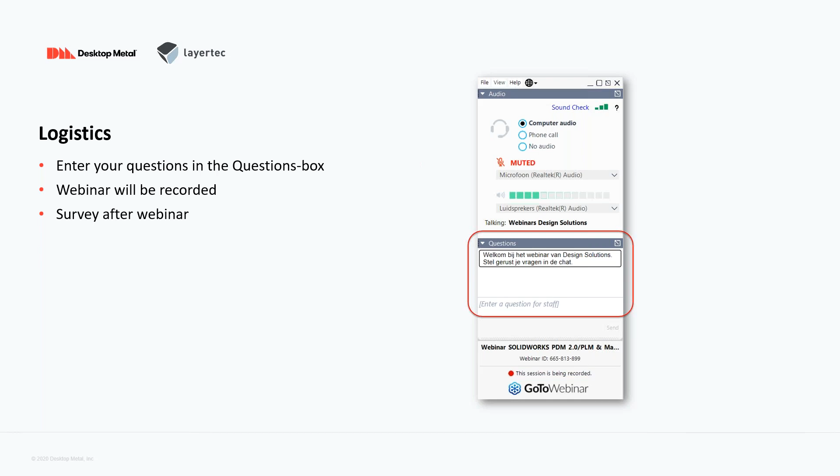Okay, let's start with a quick introduction of Layertec. Layertec is part of the Visiativ Group, serving more than 18,000 companies worldwide. We are listed on the stock exchange with the name Alviv, and if I could point out one thing, that would be that we are always heavily investing in our R&D.

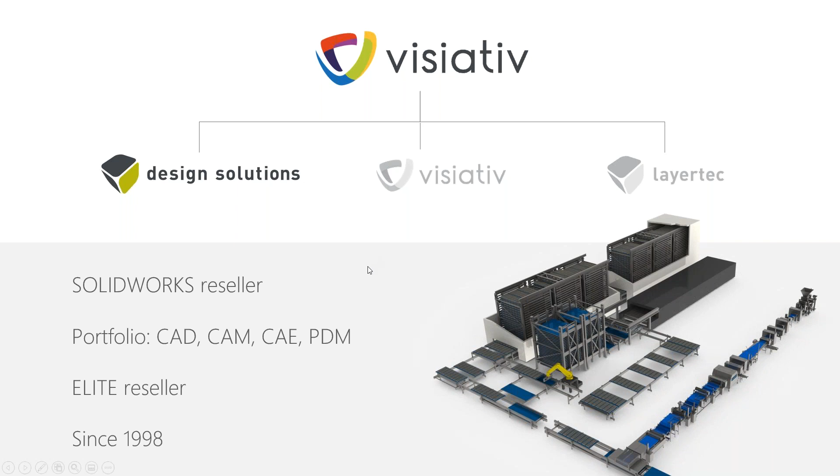When we zoom in on the Benelux, then you will see three companies in the market: Design Solutions, reseller of SolidWorks since 1998; Visiativ, with the entire portfolio from CAD, CAM up to Catia and Enovia; and of course the 3D Experience platform.

And there we are, Layertec. We are a reseller of Formlabs, Ultimaker and Desktop Metal 3D printers. We are thus enabling companies to print in plastics, in composites and metal. And with all our services combined, we are truly a 3D printing partner for more than 200 companies and professionals in the Benelux at the moment.

Okay, no problem. There you go. Okay, is everything viewing okay, Lisa? Yeah, looks okay. Perfect. Fantastic, thank you.

Good afternoon, everybody. As I've been very well introduced, my name's Kirk Dyke. I'm a senior applications engineer for Desktop Metal with a number of decades of 3D printing, metal printing, plastic printing, etc. Here to share some of our knowledge with Desktop and give you an overview of how our systems work.

So, as you know, Desktop Metal was founded in 2015. We're quite a young company. We're growing aggressively over the last few years and soon to go public. So we've created a product line that has a number of technologies.

We have our fiber machine that is going to be released next year. That will be covered in other questions or another webinar at some other date. Studio system and shop system, both currently shipping. Studio system has been shipping now for approximately 18 months and is widely around the world. Shop system is just currently starting to ship and pushes us into different applications and technologies.

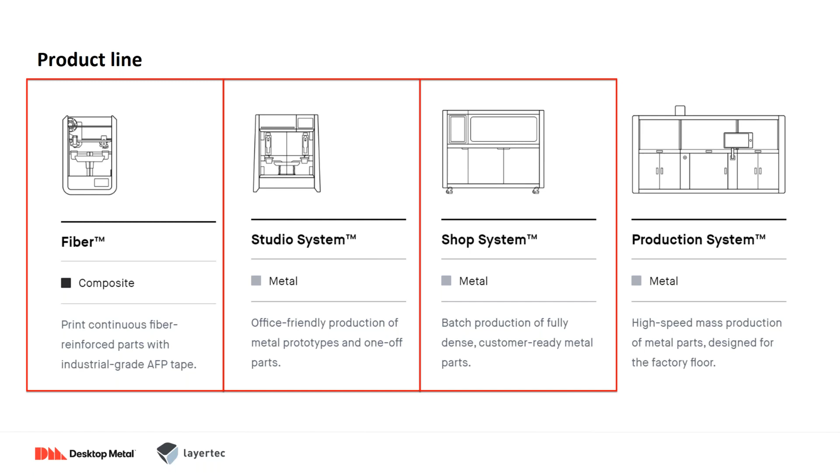So let's start with the promise of 3D printing. It comes from many manufacturers. It's a new-ish technology for manufacturing, which began for the request of rapid prototyping of certain components.

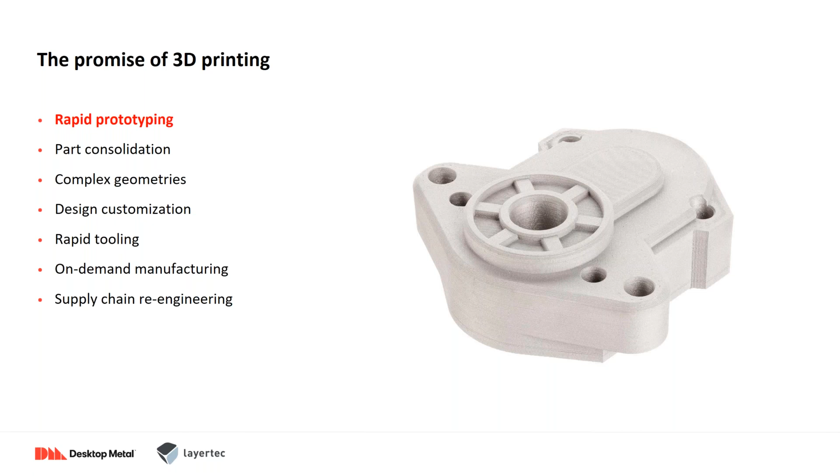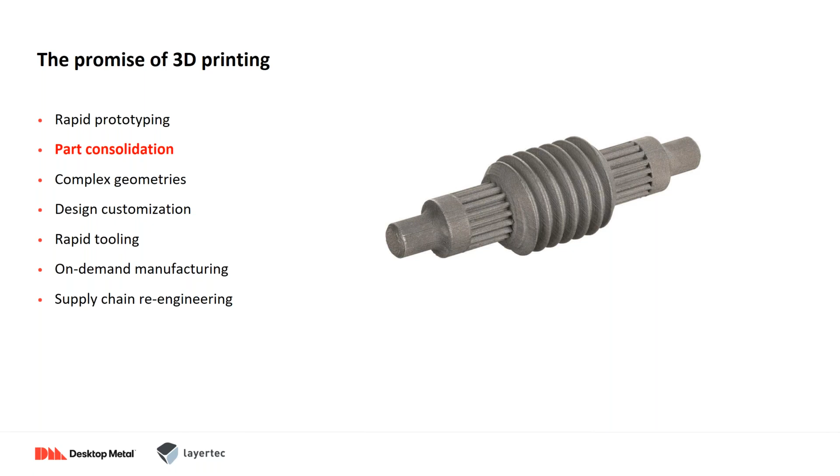So 3D printing delivers a promise of consolidation of parts, complex geometries that are either impossible to manufacture using current technologies, or we can use them to manipulate the 3D printing process and evaluate design and improve design.

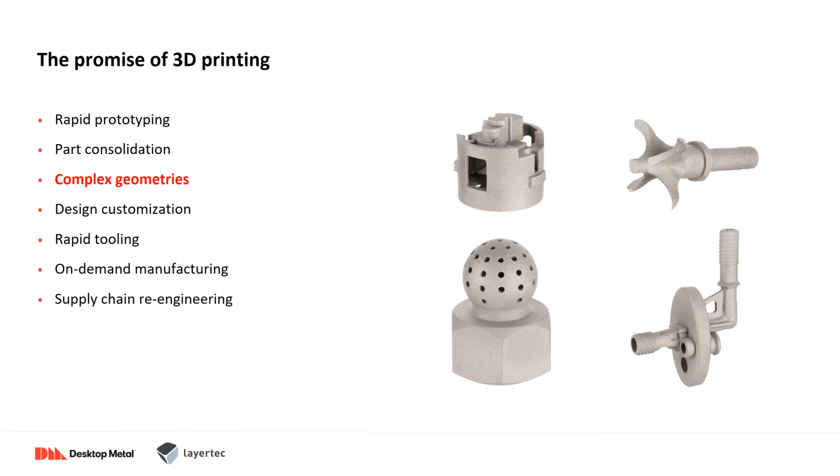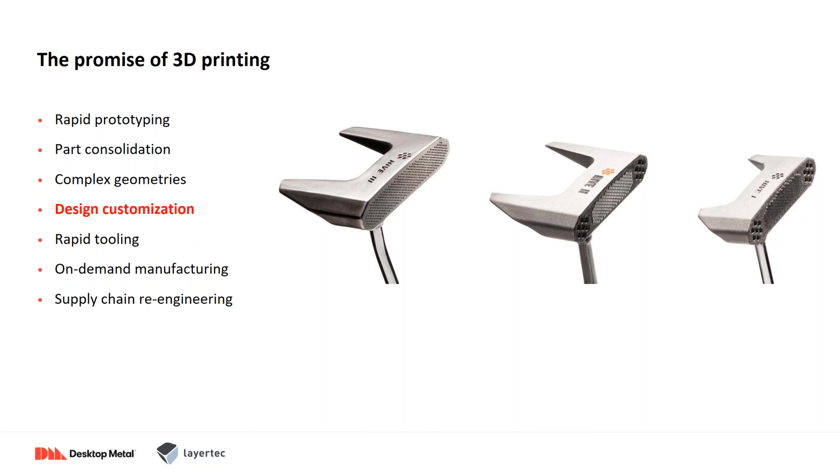Design customization, so this is derived from the consumer industry, where we have bespoke parts that are unable to be made using current manufacturing technologies. And rapid tooling, a way of creating tooling in a much faster way.

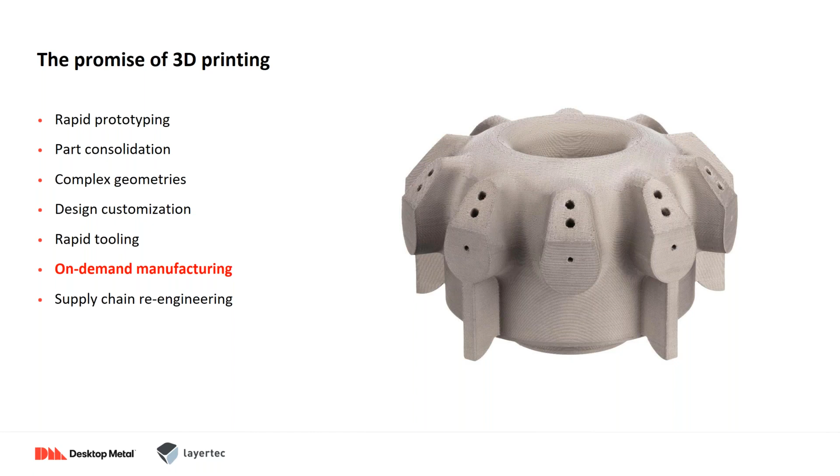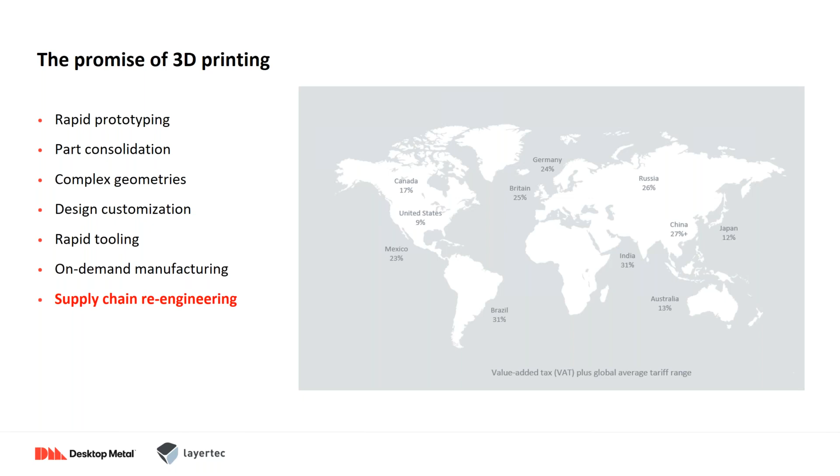On-demand manufacturing. As time goes by, this is going to become more important to the world economic climate, where we can call off a virtual library of parts and print on demand. This will lead us into the supply chain around the world, where we're not shipping parts, leading us to a greener world, a more efficient world, and hopefully a better cost-effective part.

So the first challenge we have is to deliver a product that is office friendly. We want to complete on-demand parts where we have no special facilities or highly trained operators, and we can deliver a broad palette of familiar materials. This will lead us to a path of mass production and the production unit, as mentioned earlier.

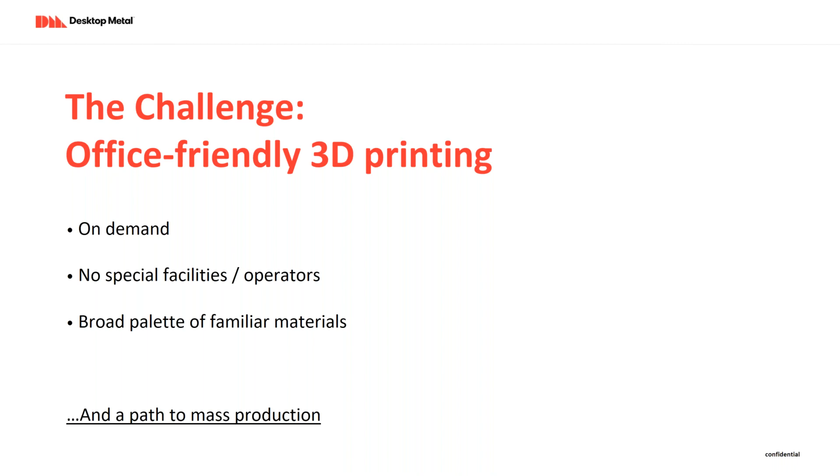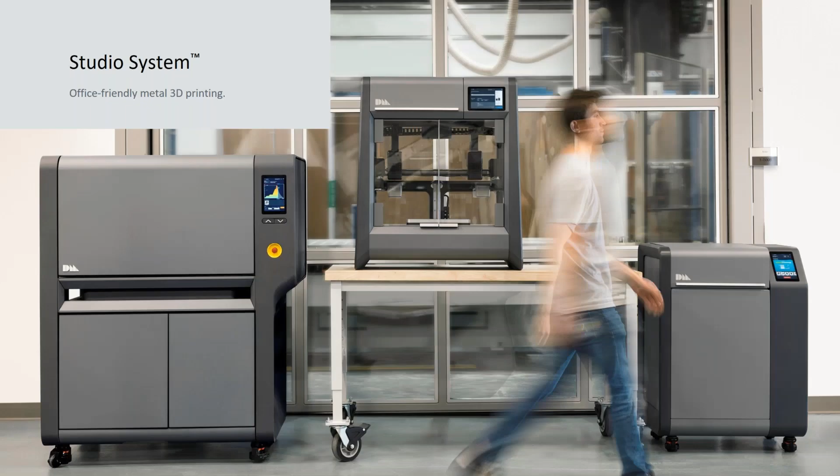So how it works - we'll start with the studio system. This product was designed with office friendly in mind, something we can install on site quickly, easily, user friendly to use. So the user interface is simple and the equipment can be easily installed into most offices.

So the idea of this process comes from metal injection molding. MIM is a powder metallurgical process, and it will enable complex shapes to be produced in mass production from inexpensive metal powders. It's been around a long while, and we've used that technology and developed it into our own. It's widely accepted and validated to ASTM and ISO standards and exists for a broad range of materials: stainless steel, alloy steels, copper, titanium, and cobalt-based alloys, etc.

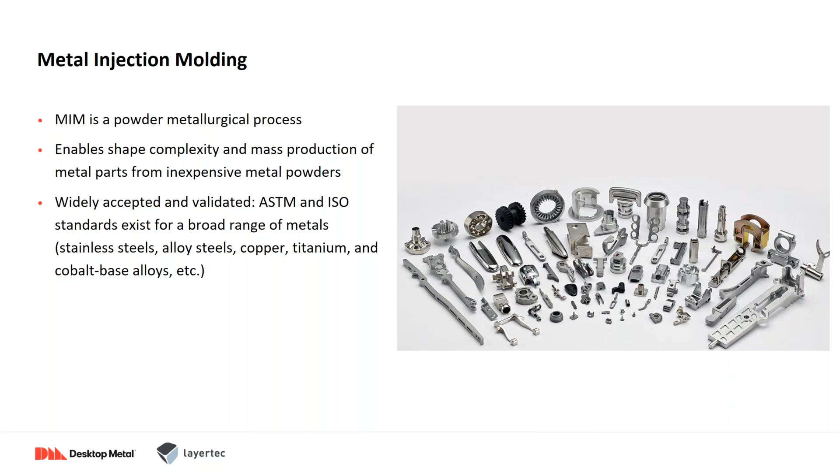So MIM uses this sintering technology for many years with many powders. But how does MIM work? And how does it compare with our studio system? So let's start with MIM.

So MIM uses a mix of metal powder and binder into a feedstock - you could say a slurry type form. This is then put into a piece of equipment similar to injection molding, which will require tooling, and the parts are injected and created, so we can have a production level of parts coming off this machine.

But we still need to remove the binder that is holding the parts together at this point. So we have to go into a solvent-based product to remove the binder that is holding the metal particles together. This is then taken in a raw state and placed into a furnace which densifies the metal particles and creates our solid part. So that's MIM, and that's the process of how MIM works.

We've taken that technology and we've transformed it into a 3D printing technology. So where do we compare? First of all, we look at the metal powder and binder that's used in MIM. We use a feedstock, which is very similar to what MIM is using. We combine metal particles of powder and binder together and create a feedstock rod.

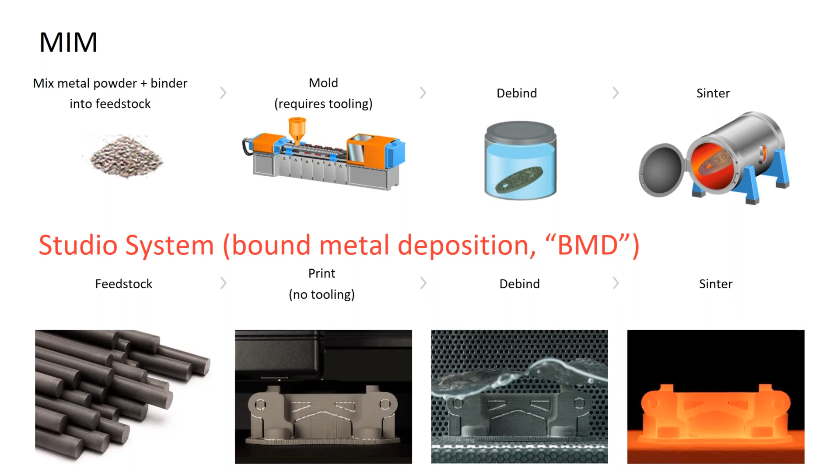So in order to do this, we have a three-dimensional printer, very similar to the FDM process or FFF process, and pretty similar to designs that you've used in the past over the last couple of decades that have come from plastic extrusion. So we've designed the printer to be office safe, to handle the material and the powder rods, so there's no powder handling whatsoever with regards in this process.

Again, the debind is necessary to remove the binder. We've created a product that has low emission in design. It automatically distills the solvent inside, removing any binder or wax, and it's safe for an office environment. The furnace also - we've taken a lot of time and development to create one of the first office-friendly sintering furnaces. This will fit through a door and at its peak can reach 1400 degrees C. This is where we will place our parts and densify the powder particles into a solid metal shape.

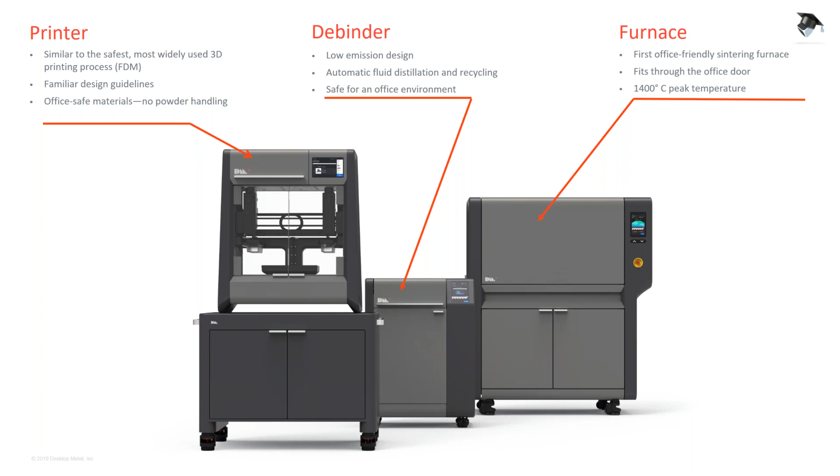These metal shapes are what we call near net shapes. So the printer is capable of printing a part 12 inches by 8 inches by 8 inches, 300 by 200 by 200 millimeters. And the resolution, accuracy and surface finish is similar to casting. So we need to have the expectation of dimensional capabilities. At this point, it's geometry dependent, but we use a rule and a general direction of plus or minus 0.8%.

Any critical dimensions that are needed can be achieved via post-processing, for example CNC, EDM, grinding, etc. Remember, this is a metal part. Whatever you could do before with a metal part, you can do now with this metal part. It's fully compatible with traditional finishing operations also. So if we need to polish, we can tumble, we can blast, we can plate it, we can even weld these parts together, and we can heat treat them.

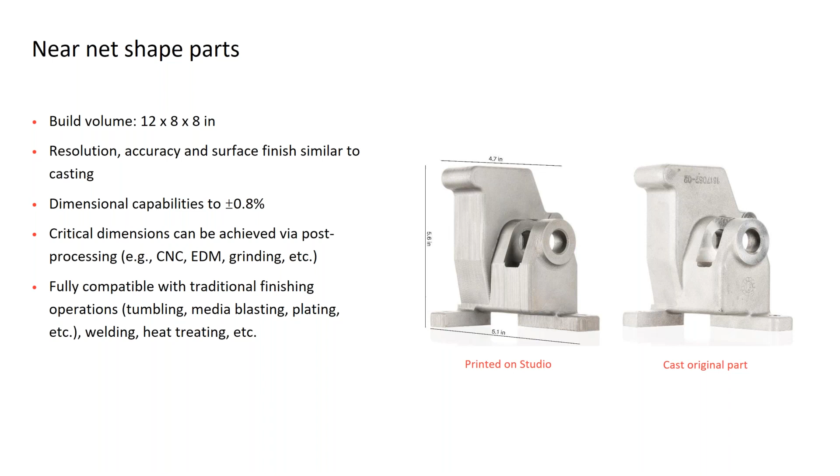So we ask ourselves, what materials are available for the studio system? At present we use 17-4PH stainless steel or 316L stainless steel. Recently we've released H13 tool steel and 4140 carbon low alloy steel. Soon to be released is copper, all being well this year, and sometime early next year we should be looking at releasing alloy 625, or Inconel based alloy powders.

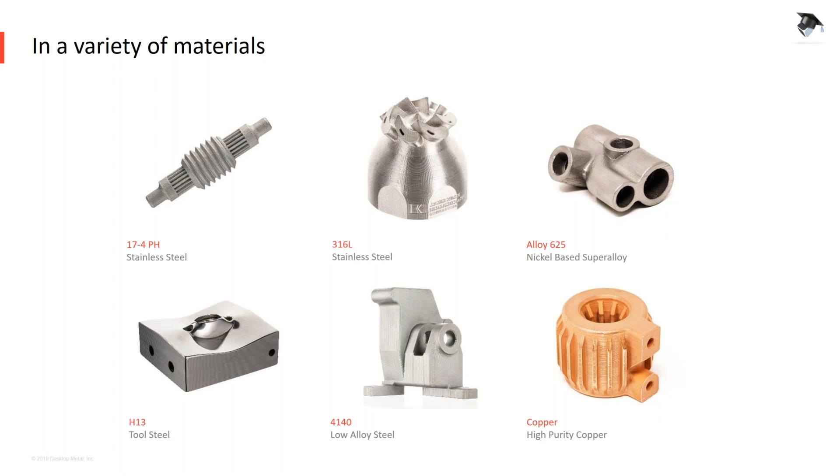So let's just recap on the studio system. What are the advantages? No hazardous powders, no respirators, no dangerous lasers, no third-party equipment, turnkey, no dedicated operators, no welded supports, and no special facilities required. Every office would be glad to have this as part of their portfolio to use.

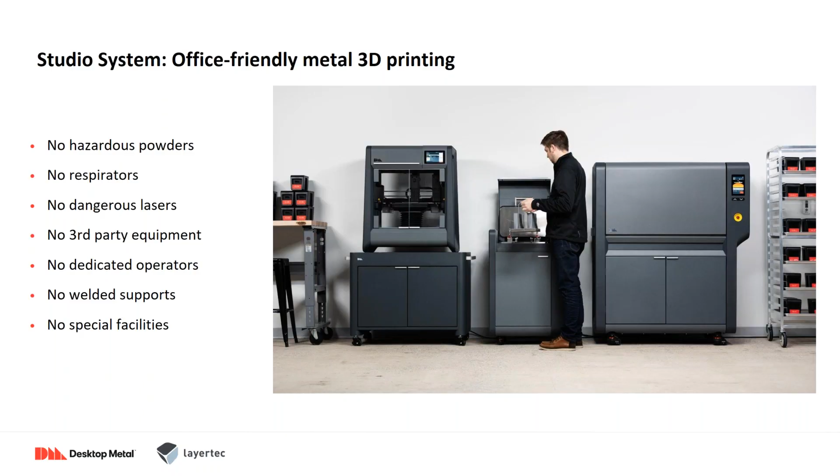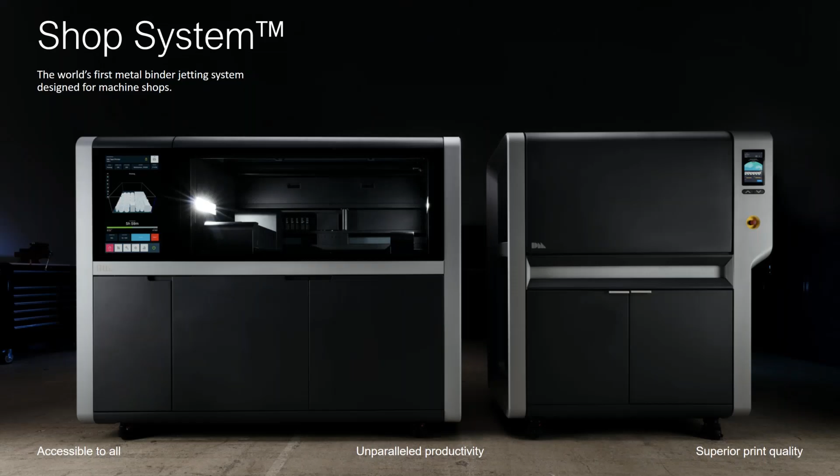So we're going to move on now to a more powder-based, our newest product in the portfolio of equipment to desktop metal. And how does a shop system work? The screen in front shows you an example of the shop system printer, and on the right is the shop furnace.

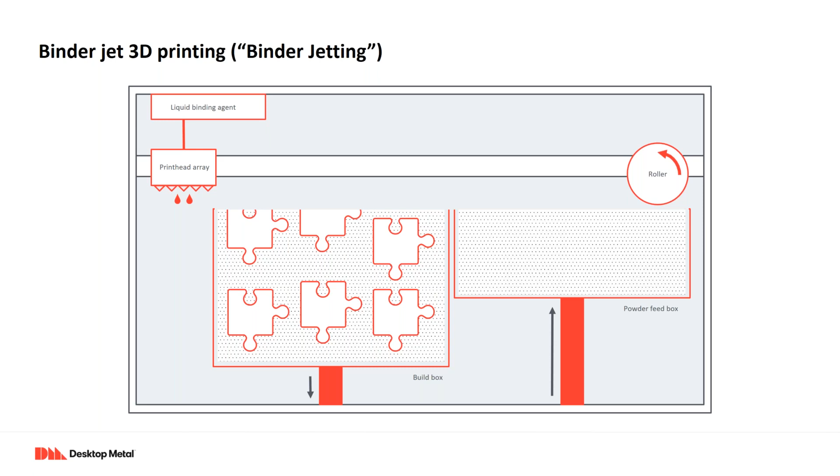How does this work? So we look at the feed box. The feed box is full of powder. A roller will take a layer of this powder and put it into our build box. The print head array will come across and print its two-dimensional geometry on that particular layer. The build box will lower, the feed box will raise another layer of powder, and the print head will print the second two-dimensional layer, eventually creating a three-dimensional part, which can be removed from the natural support of the powder and sintered.

With this process, we don't need to debind through using a solvent, but there is still binder that's being applied to the part. We can thermally debind this through the furnace itself. This is an example of the ramp-up curve and the time for the sintering process to go through. So we ramp up, we thermally debind, we hold it for some hours, and then we ramp back up to somewhere around 1400 degrees where we sinter the parts together, and then we naturally cool down to create our solid part.

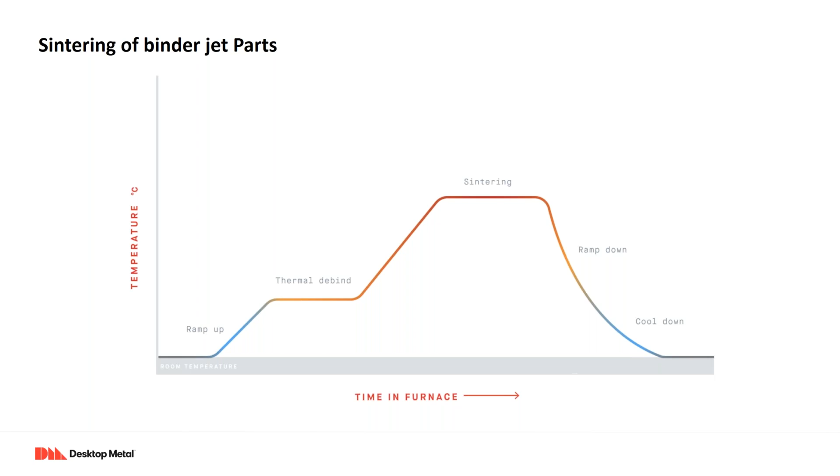So the shop system has some advantages that we can take to low volume or even high volume production. It's unparalleled productivity. Produce various parts, geometries simultaneously without the need of multiple setups. Produces hundreds of near net shape parts every day with dramatically reduced labour costs and expanded geometric flexibility.

And as you can see from the example on the right hand side from a build box taken from the shop, you can see a number of parts, all different geometries, all built together in one go. This means we can pull from our virtual library and build at need.

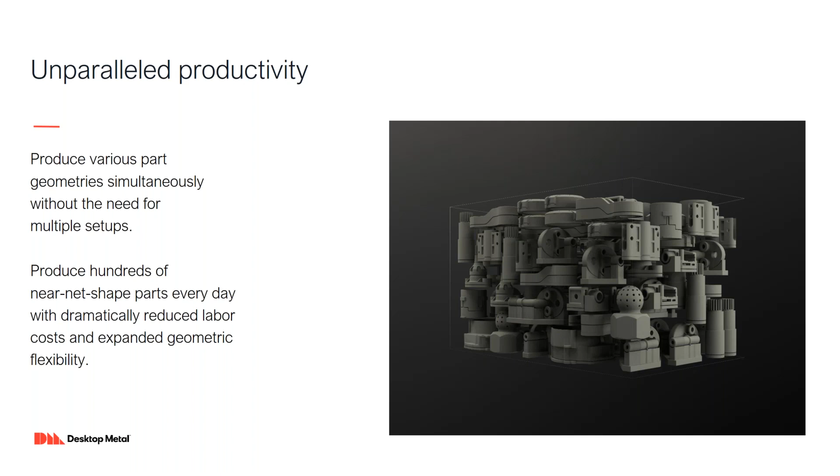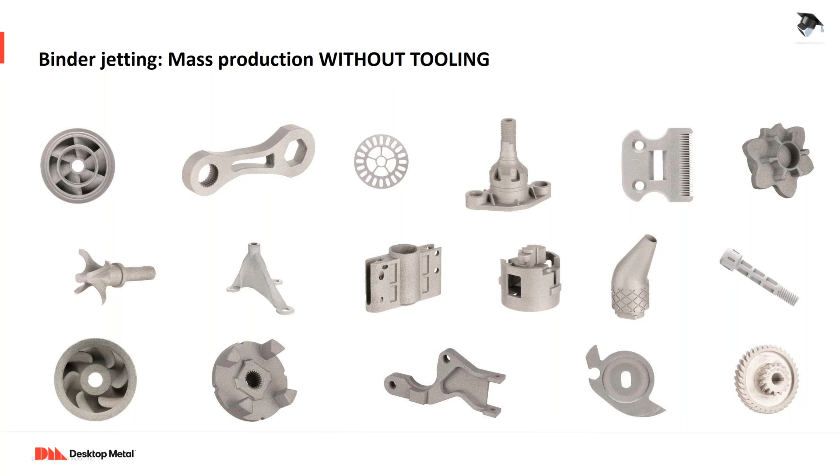So as in MIM, we have a wide range of applications. And binder jetting can give you mass production, but without the tooling costs. These are some examples of some small components that we've successfully created and achieved. Some more examples here showing the quality and the detail that we can achieve with shop system.

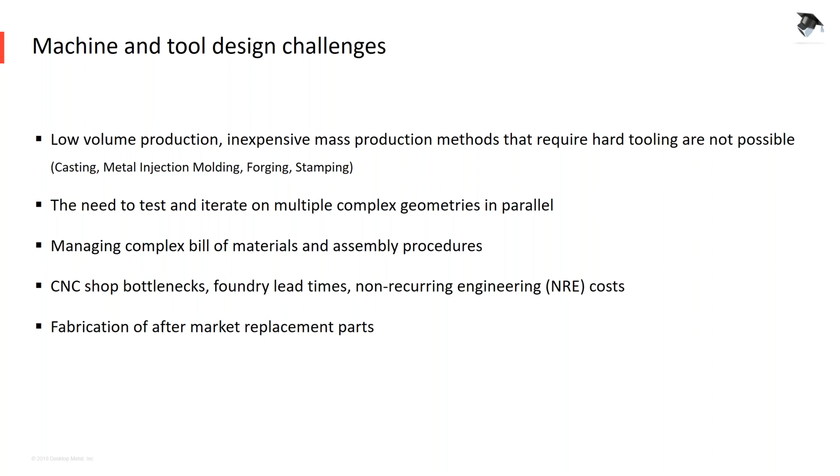So where do we fit as additive manufacturing solutions? For low volume production, we don't require tooling to use our process. And the part cost stays the same if you need one or you need 10,000, and we're capable of delivering that. So you need to test and iterate multiple complex geometries in parallel - rapid prototyping parts in metal in the comfort of your own office. Test function under high load, heat and corrosion, and not just form fit.

Managing complex bill of materials and assembling procedures. Using 3D printing, we can consolidate assemblies, allowing for greatly reduced part counts and simplified assemblies.

CNC shop bottlenecks. We can take manufacturing into your own hands and greatly accelerate manufacturing lead times, and fabrication of aftermarket replacement parts. So there's no need to keep parts in a warehouse for replacement parts. Just pull up the file, print, sinter, and ship the part in a few days.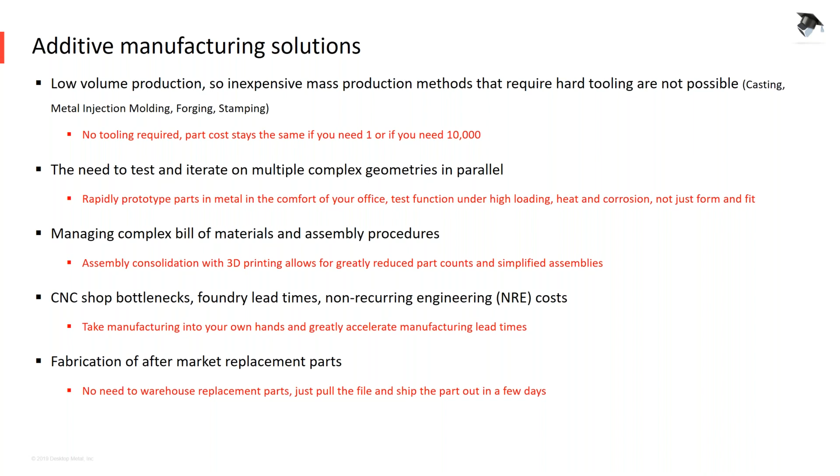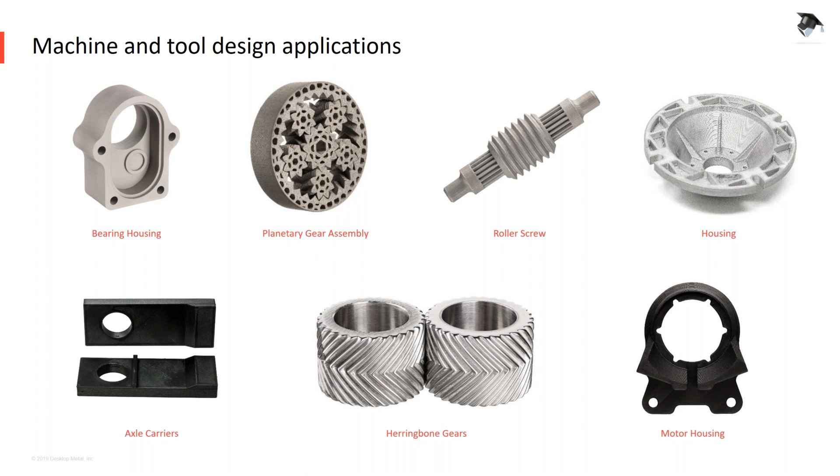So I'm going to move into a motor mount. Tool design can be quite complicated and we need to reduce space, reduce cost, and we may have to have many iterations of certain housings or mounts that we need to do.

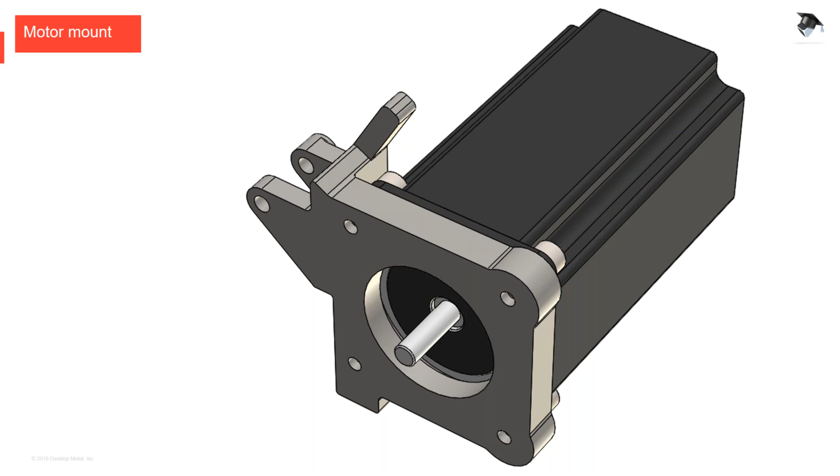This is an example of a standard NEMA motor that's going on a piece of equipment that requires lots of CNC setups. You have to send the requirement down to the shop and wait for the billet to be machined, wait for space on the CNC machine. But during development, prototypes change and we can do this very quickly. We also have lots of different sizes and geometries that we can produce.

So for low volume manufacturing, less than 50 a year, on-demand printing eliminates CNC cost and inventory. The part on the right is 3.5 inches by 3.4 by 1.1, for reference.

And for reference at the bottom, we've done some calculations with an outsourced CNC shop and what our cost would be against a studio system. First of all, you look at the cost - it's considerably less than CNC. What's probably more important is the lead time. We can create these parts in days rather than weeks.

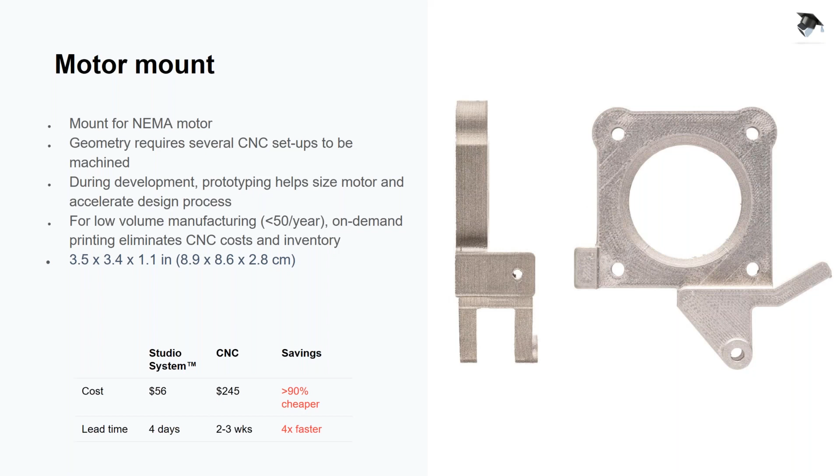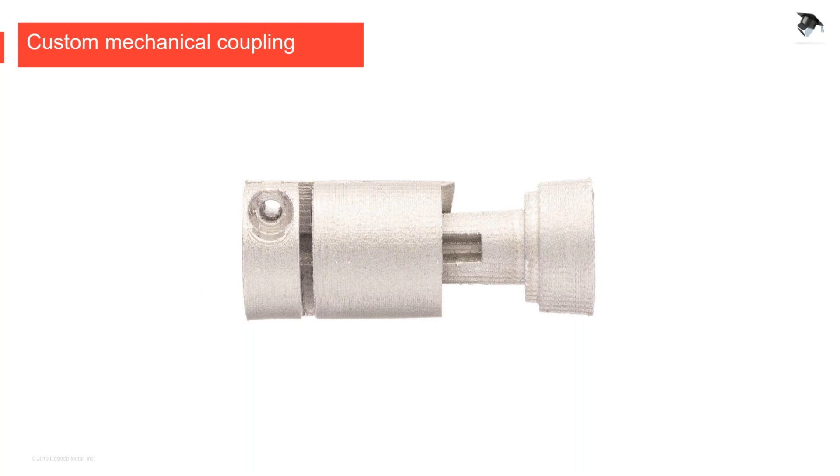Next example here is a custom mechanical coupling - a small component, quite complicated in geometry, but very easily done on a 3D printing metal machine. This custom coupling for a rotary powered transfer between custom pieces of machinery has complex geometry to optimize power transfer.

We've got the freedom of design here to transfer power in different ways than we could do when we had to machine these. It must be metal due to strength, stiffness, and lifetime requirements. So it's prototyped on the studio system, but would ideally be suited for mass production on the shop system.

For reference, part 1, part 2, you can see 1 inch by 0.9 by 1.6. And again, if we look at some outsourced costings that we have for CNC, the cost is considerably less, especially for low volume production. So a studio system can get you to the point where your design is correct, and then you can lock it down and build a low volume production run on a shop system. This particular one was costed at 750 sets per week.

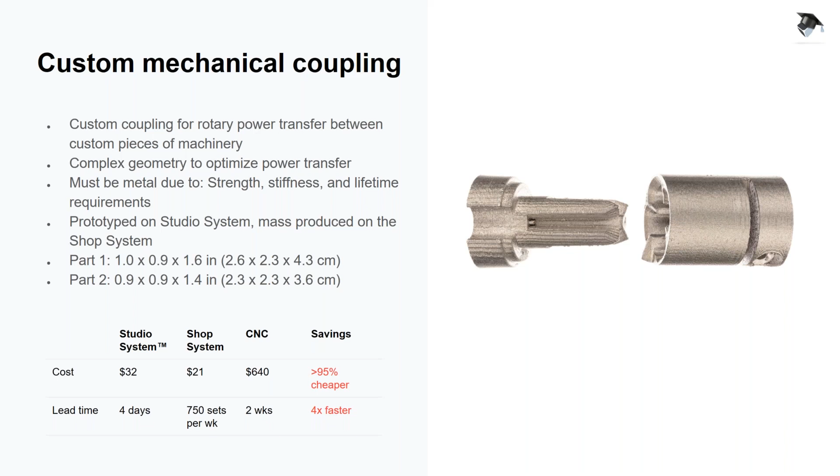Another example here is a motion stage fixture or flexure. This is to enable or to stop vibration. This was designed and developed on the studio system.

A flexure is an engineering component designed to be compliant over a small range in a predictable manner. The flexure is used to allow the ball screw and motion stage to be slightly askew without binding or causing excessive wear. So complex geometry, thin wall makes machining, water jetting for instance, cutting particularly tricky and expensive.

It'll enable us to prototype and zero in on the best design using the studio system. And then we can move forward again onto the shop system where we can do low volume production. Again, examples below and for reference sizes of the part.

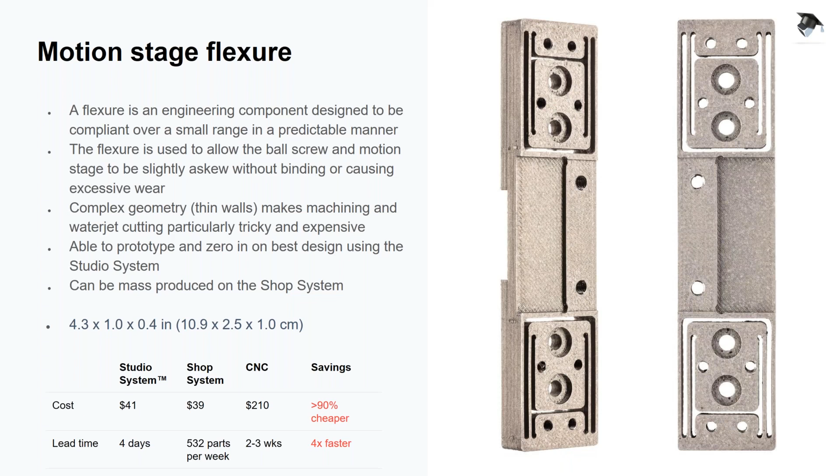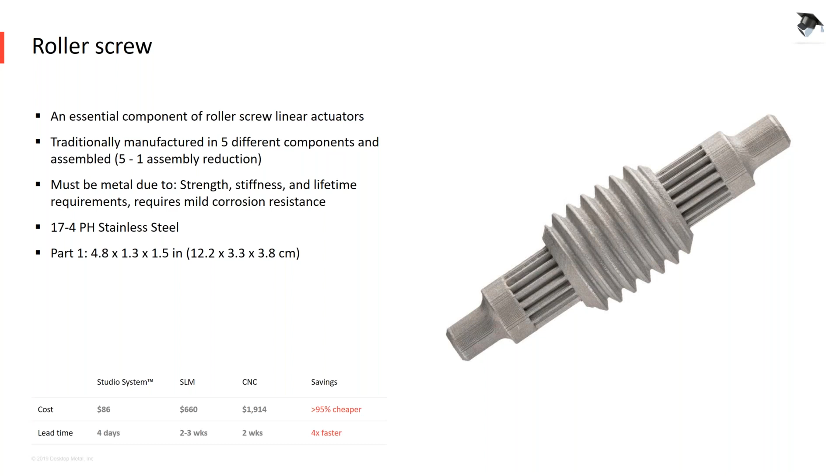Another example here is a bespoke worm gear speed reducer. Again, 17-4 stainless, and you can see this was compared with a current product, and we were able to achieve 72% lead time savings, and also, more importantly, a 95% cost saving.

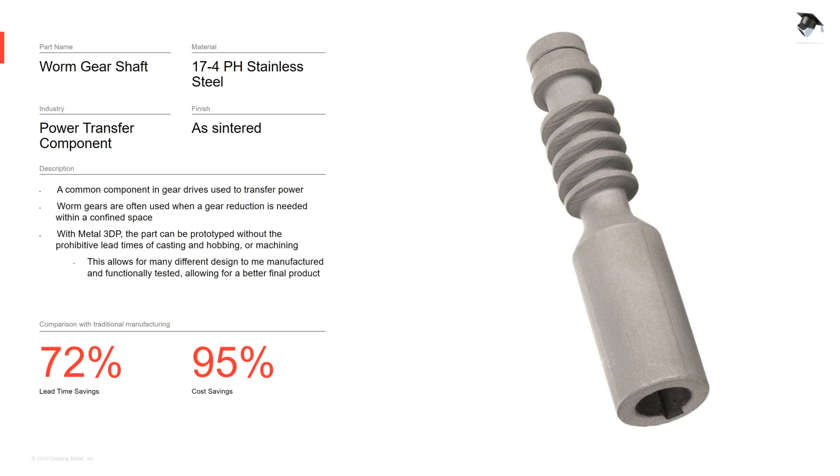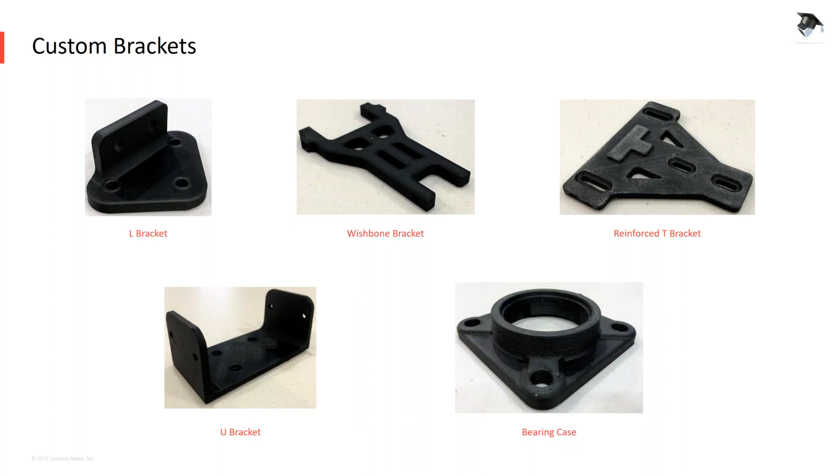This is a company where they have a 2001 BMW M3 and they want to fit it with a V8, but we need to use the existing mounting structure to hold the engine. So the guys here have reverse engineered this particular component - they've scanned the existing one and implemented this into the fixing positions of where they need to be.

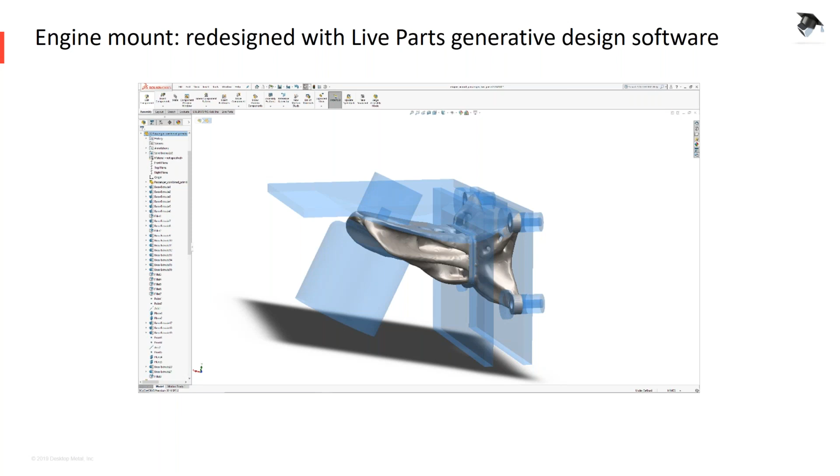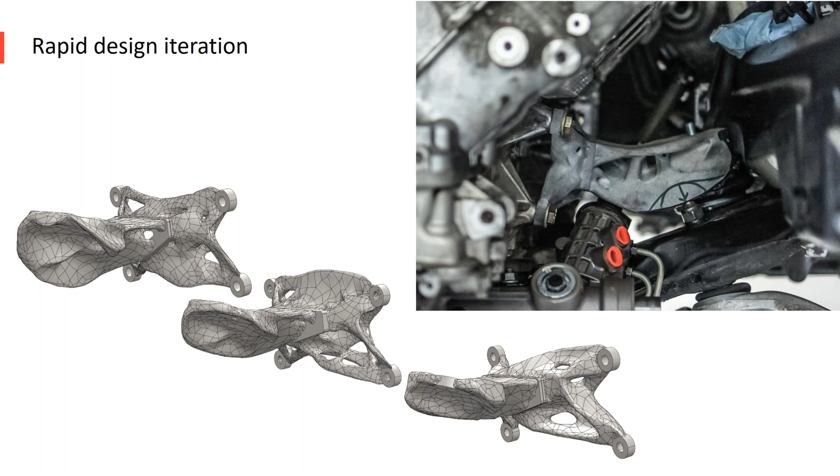Tested rapid design iterations using software, and being able to print a specific component that can hold a modern V8 engine in a BMW. You can see from this example, two parts were created and welded together.

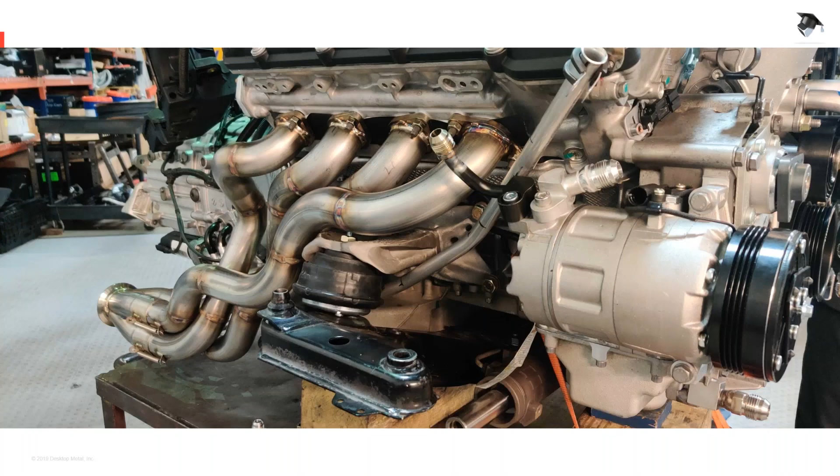This was then put into the car, and you can see the reasons why we wanted to ergonomically design this particular part to fit on the current test bed and the current setting of the engine mounting points of the car. It's very tight in there with the exhaust manifolds, but we still need the strength to hold the engine in the power.

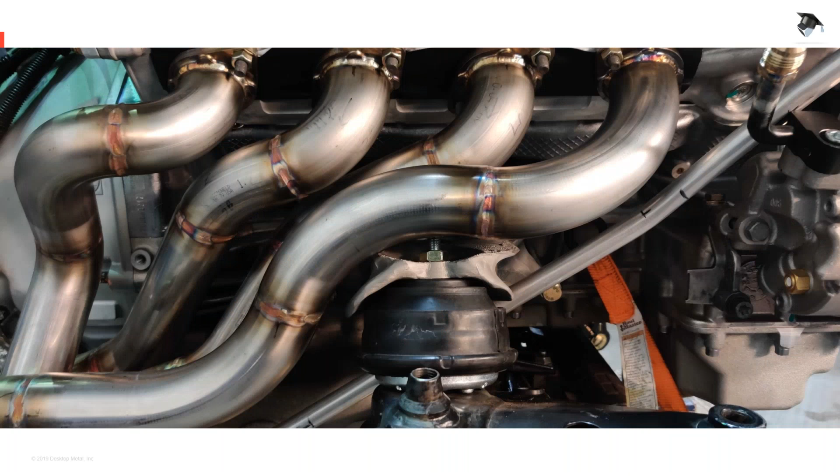More example here of how tight it is inside the engine compartment.

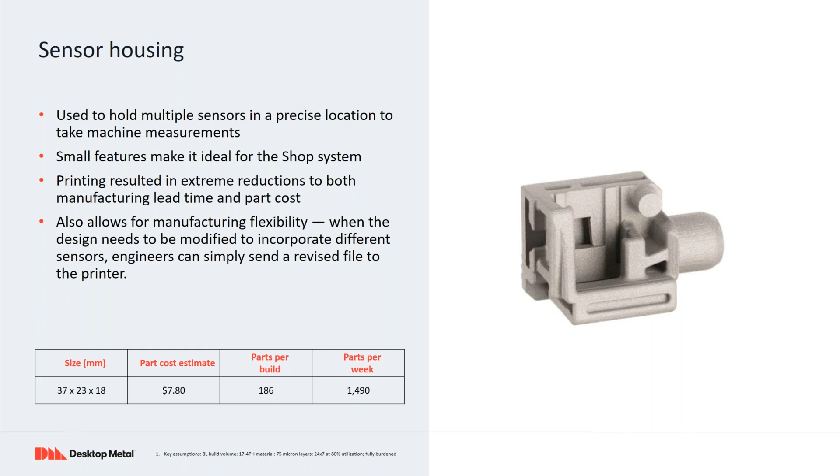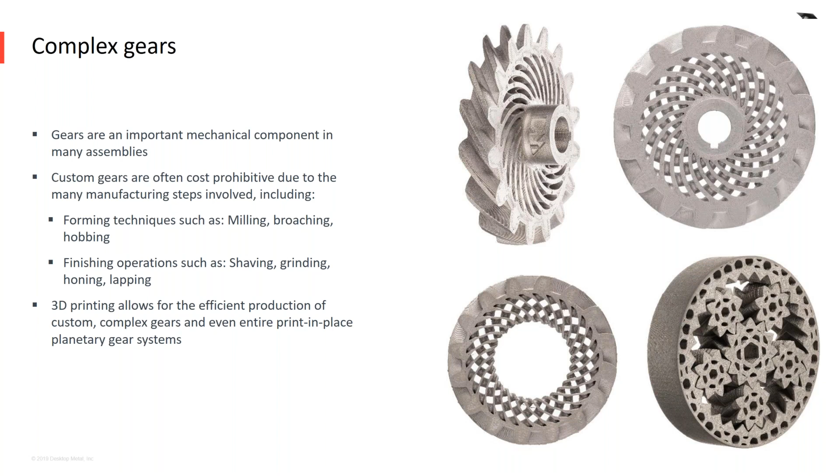3D printing suits very well to complex gears. These are some very complicated gears to machine, but very simple to produce in a 3D printing process. Herringbone gears, mentioned earlier, are very difficult to create, but very simple to create on a 3D printing process.

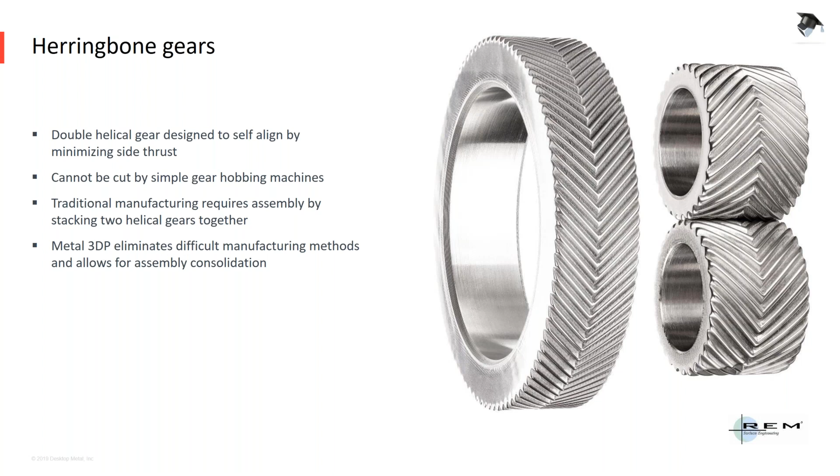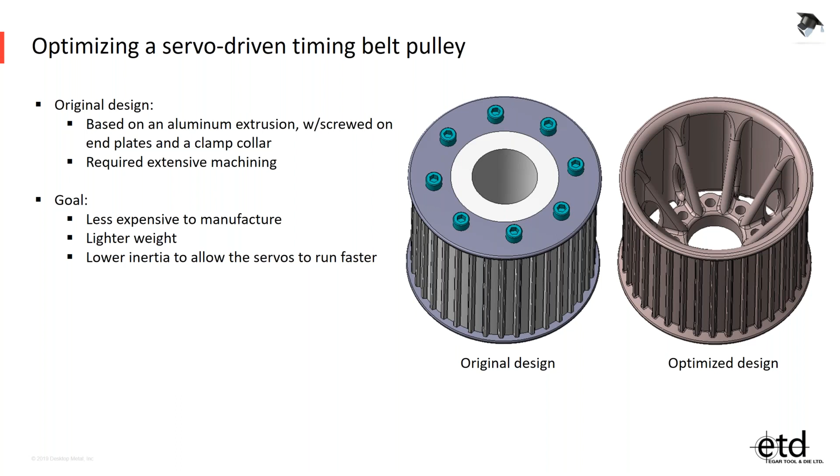Optimizing a servo-driven timing belt pulley. This was originally designed as multiple components and was quite heavy, and also needed to be balanced well on the machine for the timing belt. So the goal here was to build a less expensive to manufacture part, lighten the weight, and lower the inertia to allow the servos to run faster.

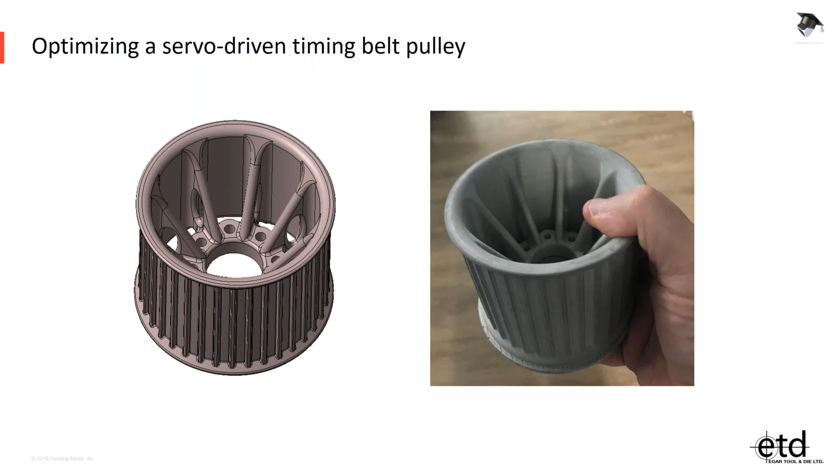This again was done on the studio system. Very simple, work on CAD, work on design, and a very quick part was printed within a week and was actually assembled onto the machine.

Bearing housings. Housings for press fit bearings needed to be produced quickly out of steel using the shop system. Required parts were printed in just one day and were ready for assembly in less than a week, requiring almost no operator labour. Printing on the shop system dramatically reduced manufacturing lead times for these parts compared to traditional manufacturing methods.

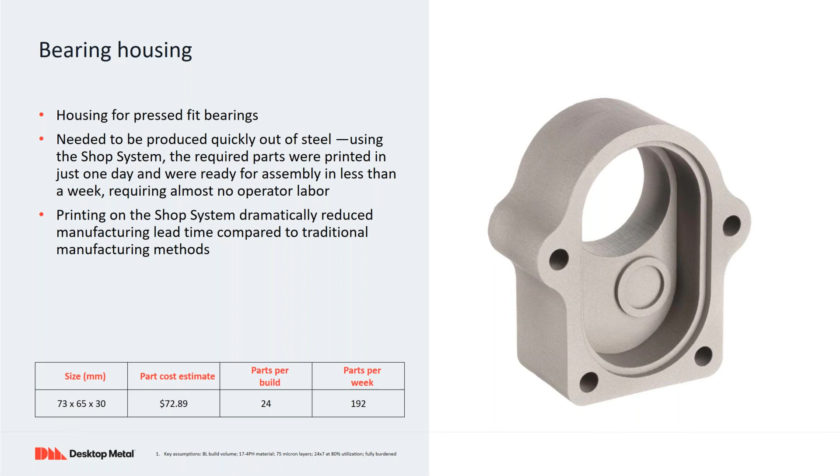Another case study that's come from the US is an assembly line ratchet tool, a very bespoke piece of equipment. The tool attaches to the machine in order to tighten and loosen socket head screws. This part requires metal for durability due to its repeated use. The customer is able to print this part with tight tolerances in a few days compared to weeks and weeks of machining, with a huge cost saving of 93%. Lead time saving of this particular part was 87%.

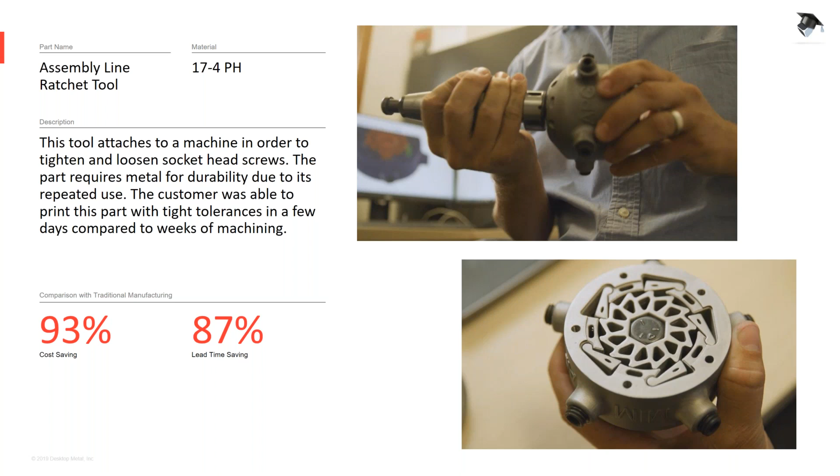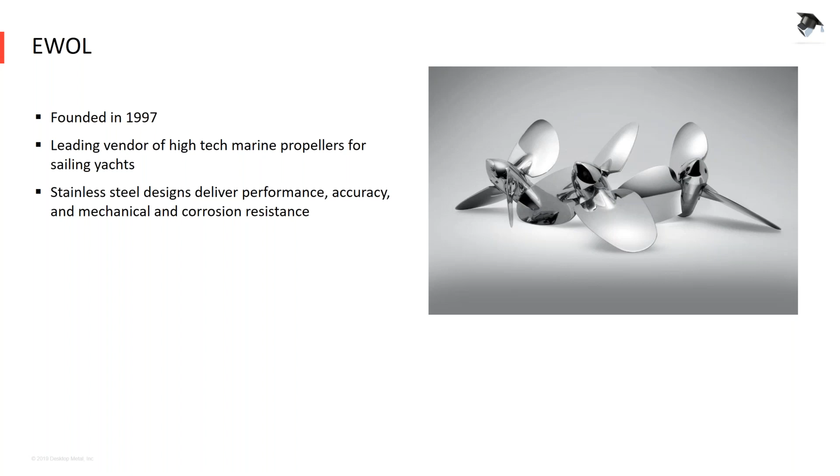Another application here in the boating world was a company called EWOL, founded in 97. They're a leading vendor of high-tech marine propellers for sailing yachts. Stainless steel designs deliver performance, accuracy, and mechanical and corrosion resistance.

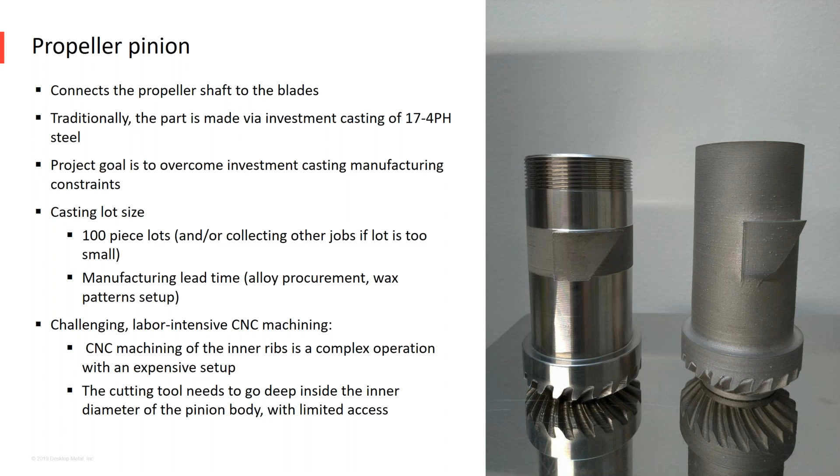An example here on the left - this is a point where we need to start to understand the sintering process. The sintering process needs to shrink during the furnace run. The part on the left-hand side is a fully sintered part from the furnace. The part on the right-hand side is a part just come from the printer itself. You can see the difference in scale that we need to be aware of.

Some more high-resolution pictures of this particular component that has been machined. Remember, we're printing a metal component and sintering the part.

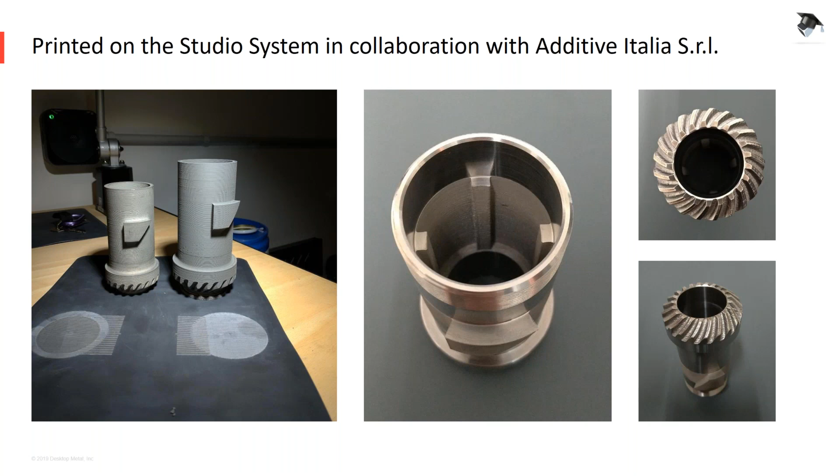Printing with a studio system was more responsive to customer demands, a faster manufacturing process to reduce health hazards, less demanding in terms of logistics, no lot size constraints, lower part cost, improved part quality, and less labour intensive, and more sustainable than casting.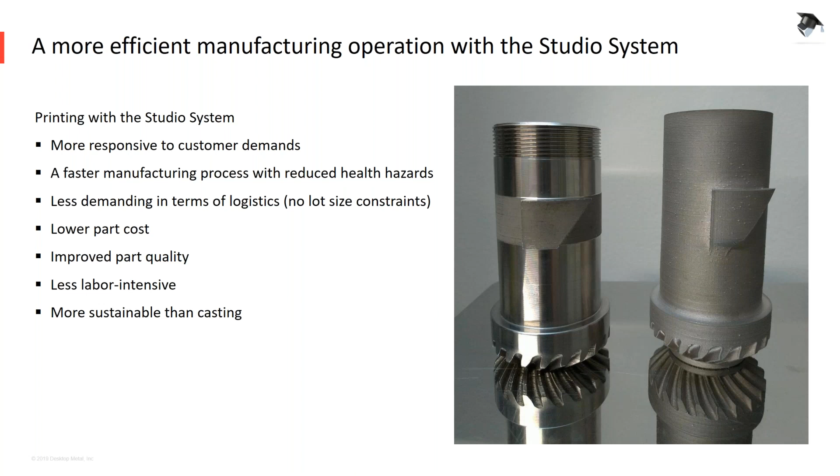So the business impact of the studio system was the ability to produce previously impossible geometries for improved performance, and it demonstrated the feasibility of additive manufacture as a manufacturing method - speed, flexibility, quality, and cost. The next steps for this company are to explore AM for volume production with the shop system.

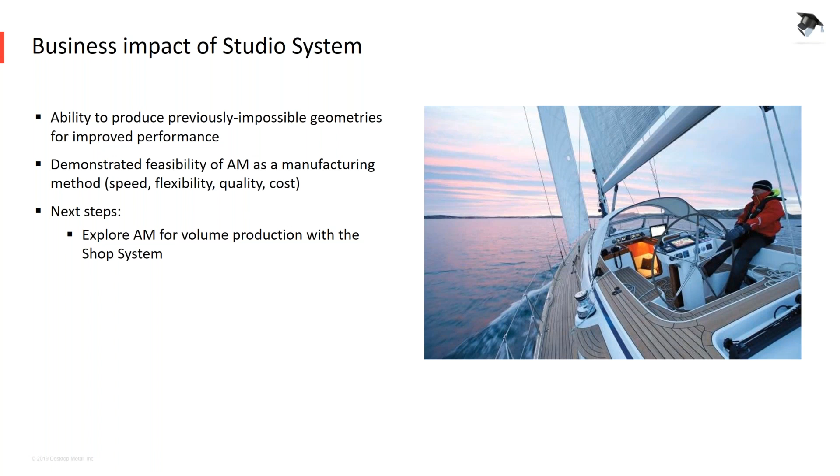The next company is a company from Italy, Cifarelli. Again, a very old company that's investing into additive manufacturing to develop its current products and develop into new ones. They're a leading vendor of agriculture and gardening equipment, with a rich history of technology and product innovation. Examples below show some of the products they deliver.

So the challenge here was a shaker hook. This is a piece of equipment on an engine that shakes a tree. It has 2,000 vibrations per minute and a stroke of 62 millimeters.

So this SC800 shoulder-carried shaker is ideal for harvesting nuts and olives. The SC800 shaker can collect over 3,000 kilograms of olives per day, with a falling rate of 95% of the fruit, without damaging the tree or its buds. So the shaker hook becomes a very important key component, and the design impacts performance, reliability, and usability.

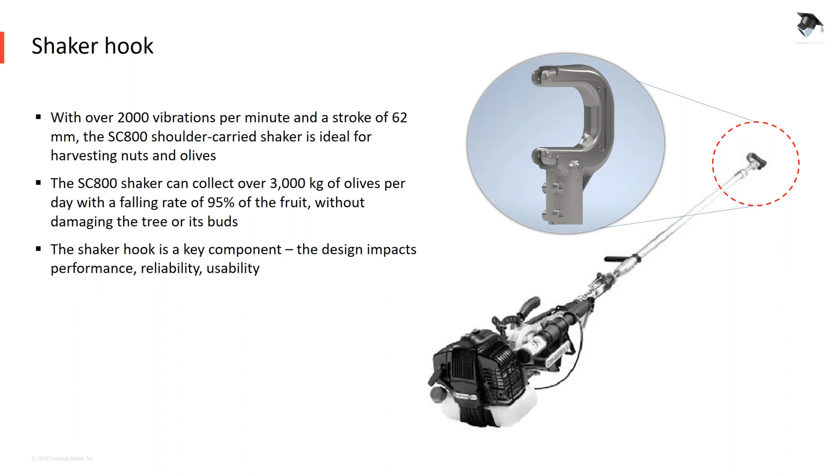So the company took this to optimize the shaker hook for custom applications. The standard version is produced by the thousands in aluminium chill casting. They want to do custom low-volume applications requiring special topological optimization, geometries, and increased strength. Weight constraints are challenging - heavier hooks would be troublesome for both the operator and the gearbox on the engine driving it. So this custom shaker cannot be produced economically via aluminium casting and must be produced out of steel, staying within the weight and bounding box constraints.

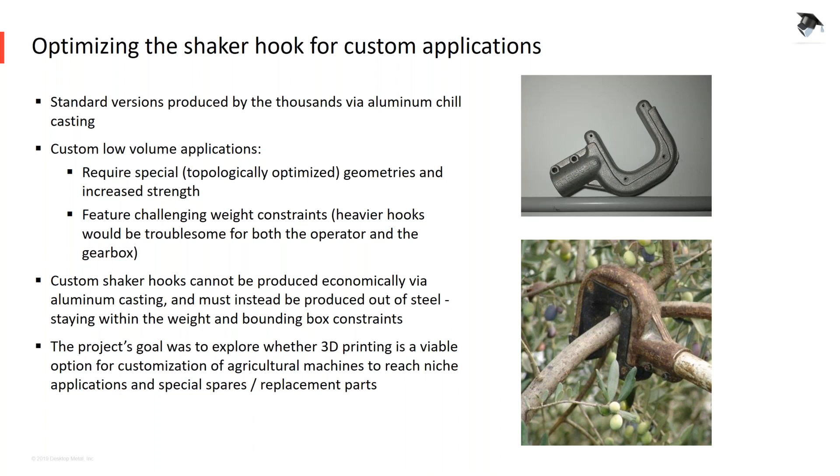The project's goal was to explore whether 3D printing is a viable option for customization of agricultural machines to reach niche applications and special spares replacement parts. Pictures on the right are the current part used. The company took it away under their own steam and redeveloped the head of this particular component and has fully tested it.

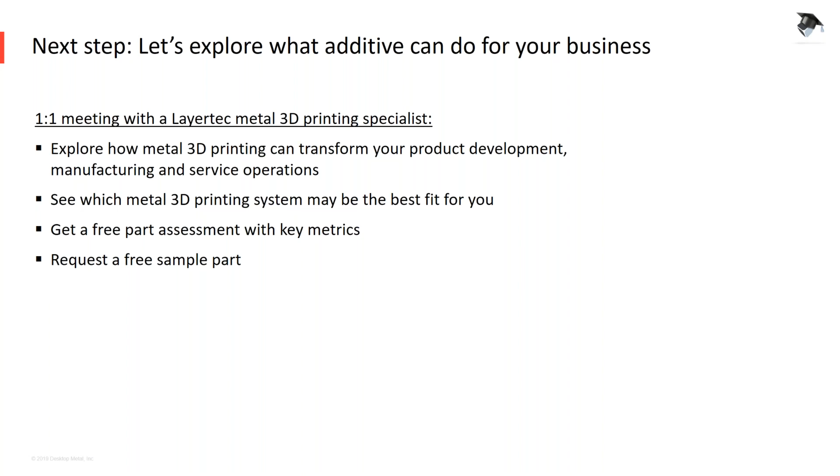This one is for Jeff, the other application engineer from Desktop Metal: How do you see the cost versus LBM? Similar, minus 20%, or minus 50%? Jeff, can you provide an answer to this? I do not have a good answer for this one, it's going to require a little bit more information. We are, of course, hoping to see a reduction in cost compared to LBM, but we would need more information to provide a better answer. I would recommend that you get in touch and we can look specifically at your scenario.